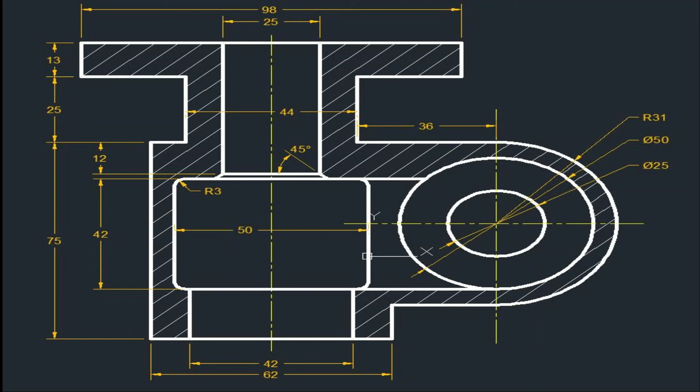Open a new file. This is the drawing. So, as we learn together, we have to select the start. I will start by drawing this circle and this circle.

Diameter of the small circle is phi 25, and the larger circle's diameter is phi 50. I will also draw the center lines for these circles. So I will draw a circle.

It is better to prepare the layers, so I will go to layer manager. In the layer manager, I will use layer zero for the visible lines, so I will choose color white, line type continuous, and line weight 0.5.

Then I will right click and create a new layer. Keep it layer number 1, or change the name if you wish, say center or hidden or whatever. I will keep it layer number 1, never mind. I will choose the color to be yellow for center lines.

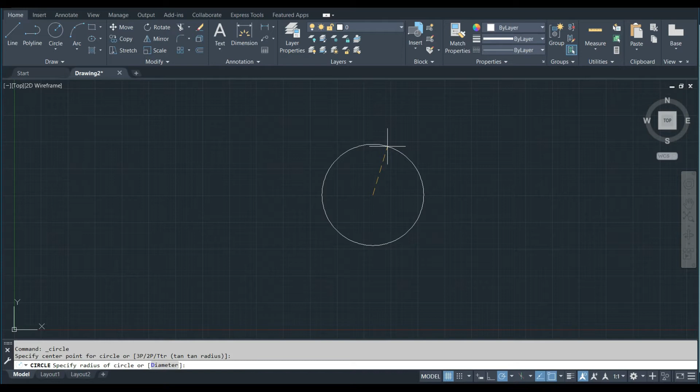Center of the circle anywhere, and diameter of the circle. Right click and say I want diameter. It was 25 for the smaller one.

Zoom in, zoom out, right click, repeat circle. I will choose the same center, and then right click again. I will choose diameter. Diameter value is 50.

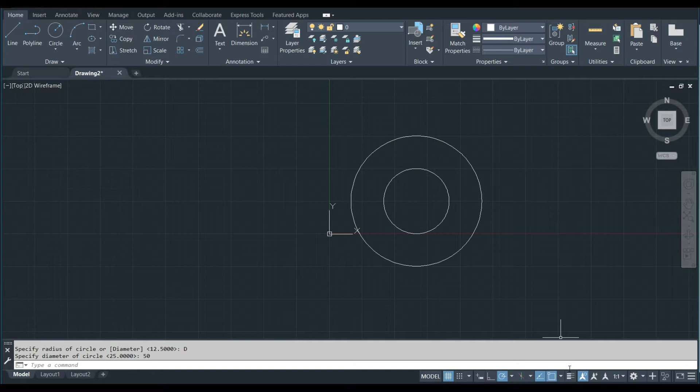As I told you, you have to go and show the line weights. Good. Now I will draw a center line.

I will go to layer number 1 and then draw a line, not from the center. I will just track, click, and then go back again, track and click. The center line is okay, but the line type scale is small.

Click on the line, right click, and go to properties. From properties, I will go and choose the line type scale. It is now 1. I will try 5 as an example. It is good, but not enough. I will say 10, enter. I think 10 is good.

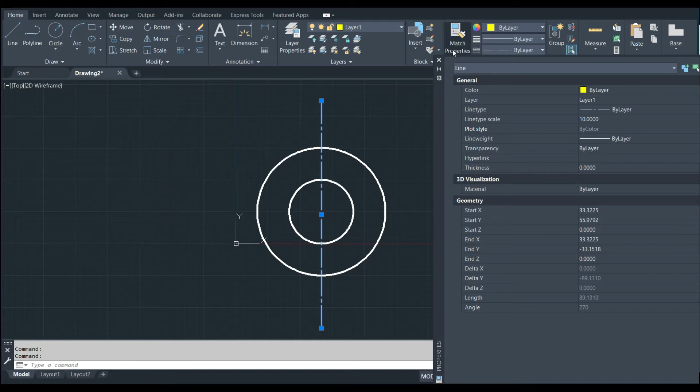Cancel it now, escape. Next, I will draw a line again. Same process - don't click on the center. Go out to make or to do tracking. Click and move again. Click here, and that's it.

And then match properties - take the properties from this line to this line to copy the line type scale and all of the properties.

Next step, I have this circle and this circle. So let me draw this semicircle with phi 62. I will go to circle, same center, right click, diameter. I will choose 62. Now this circle is on the center layer, never mind, keep it like this.

Next step, I will draw this line. This line length is 36. And I will draw the other line here, from here to here.

I don't know how much the length is. We should calculate the length. So let me check what dimensions are available here. Actually, from the center to this point, it is 36, and then 44, and also on the top we have 98, and here we have 25.

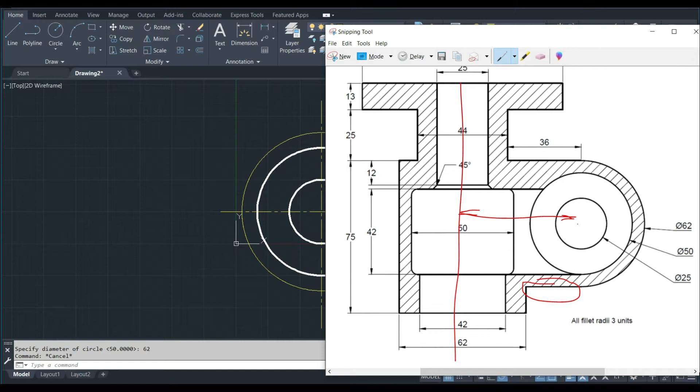Let me check if I can draw a center line at the middle exactly. Let me check how much the distance is between this center line and this center line. Let me do some calculation here.

Yes, we can say that it is 36 plus half of 44, which is 22 plus 36. It is 58. 58 from the center.

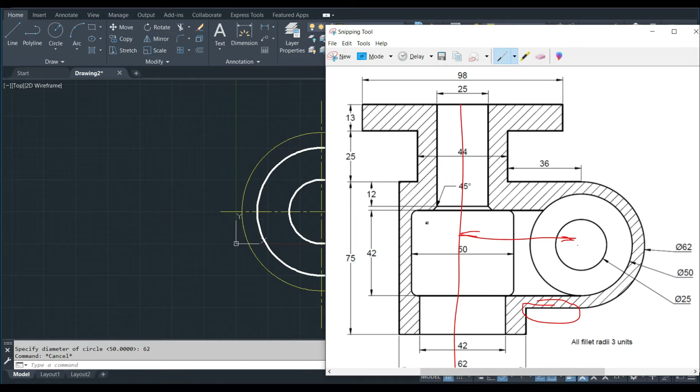So now what I will do is draw this line 36, and make an offset from this center line to here using a dimension of 58. Let me take this circle to the 0 layer, and again I will keep the 0 layer as current layer like this, escape.

Now I will draw a line from this quadrant point. I will move to the left and write 36, enter. It is 36, and also we need the offset of the center line, so I will choose offset.

It will ask for a distance. It is 58, enter. Select object - I will select the center line and click to the left, and that's it. Now we have this center line at the middle.

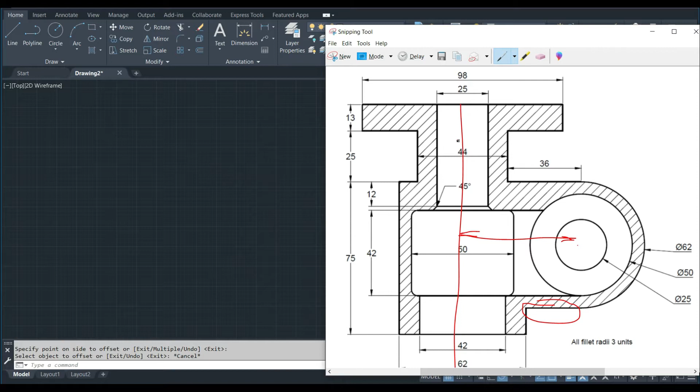Okay, we can actually offset the center line from here to here. It is half of 62, which is 31.

So I will draw a line or offset, it's up to you. Offset, say 31 distance - which line? This line to here, and let me take this one to the 0 layer.

Now as you see, we have this edge, so we can draw a line from the quadrant point here, then extend it until it reaches this line. So I will draw a line from the quadrant point to this line like this.

Now I will go to trim, select trim, right click, I will choose the mode. From the mode I will choose quick, then cut this line from here, cut this circle from here, cut the circle from here also, right click, enter. Now this line and this arc are not needed, I will delete them.

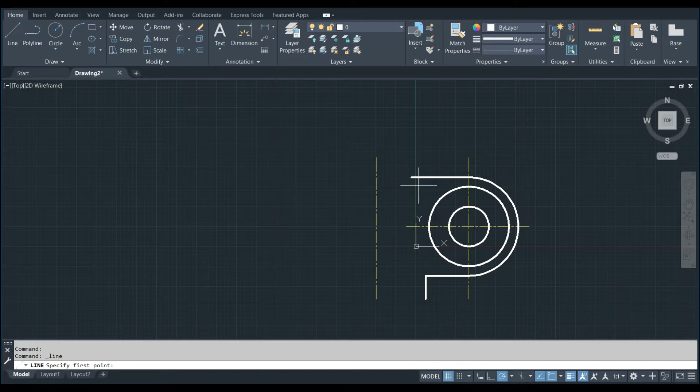Next step, we can draw this line from here to here. We need the length, it is 25. So we can draw a line from this point, go up. Before typing 25, be sure that the line is in a vertical direction. 25, enter. Next step, I will go to the right.

I need this length, actually we can calculate it: 98 minus 44 divided by 2. 8 minus 4 is 4, and 9 minus 4 is 5. So it's 54 divided by 2, which is 27. So we should go to the right, 27, enter.

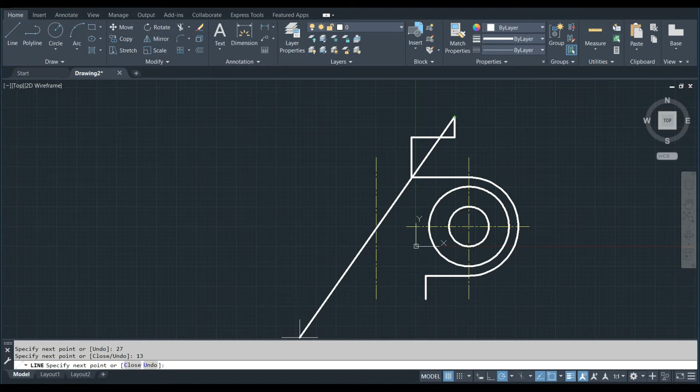And then I will go up 13. Now this is to the top, 13. Before pressing enter, I will be sure that the line is in vertical direction, and then I will go to the left by 98. This is 98, enter, and same story, guys.

I will track this line, this point, click here, and then go to inside. It is 57, I think. No, not 57. So I will right click undo. Maybe I forgot, let me go back and check how much this distance is. Again, it is 54 divided by 2, it is 27. Yes, it should be 27.

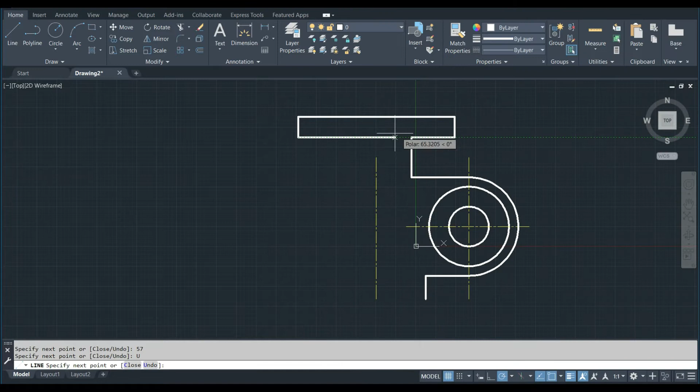So 27 like this, enter, and then go down, track this point, click, and then check. I will go to the left again. We draw this line. Okay, I will stop here.

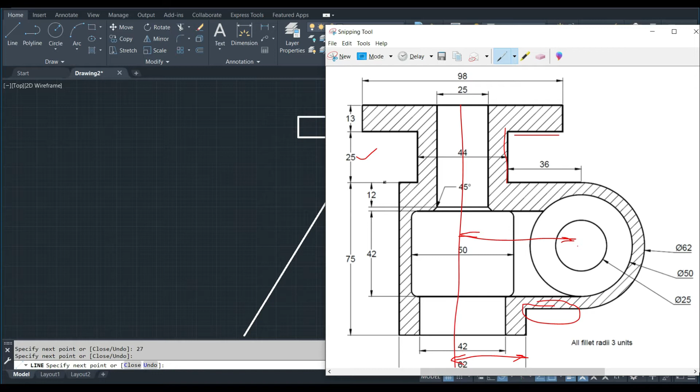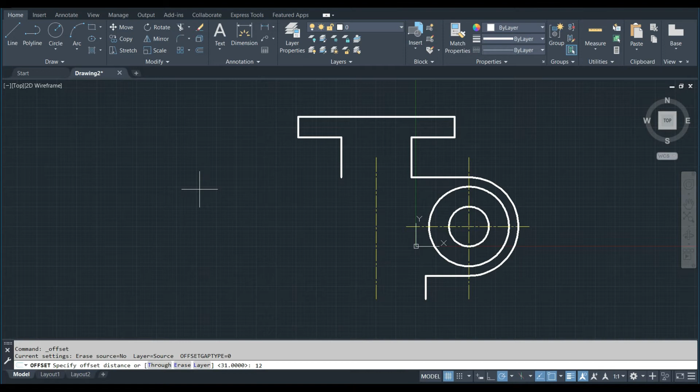Next, I need this line now, this line, and this line we can offset from the center by half of the 25. So we can choose offset, 12.5, this center line to the right, this center line to the left, escape, select this line, and go to layer number 0, or you can match properties, it's up to you.

And now I have these two lines, this line and this line. The line height from the top to the bottom should be 13 plus 25 plus 12. So we have 25, 25, 50. So total length is 50. Let me extend the line.

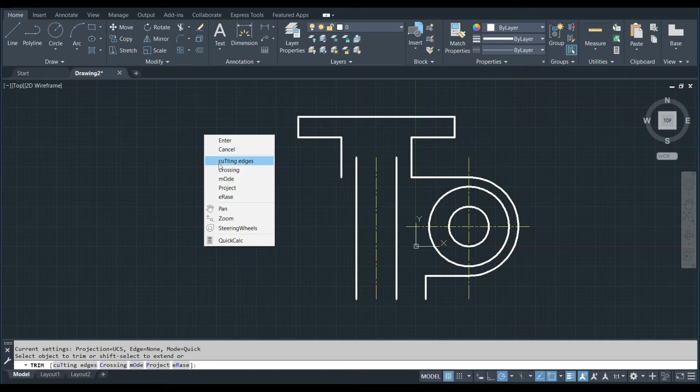Same, I will go to mode and select quick. Click on this point. No, this is trim, sorry. Control Z. Extend, right click, mode, I will choose quick. And then click here, then click here.

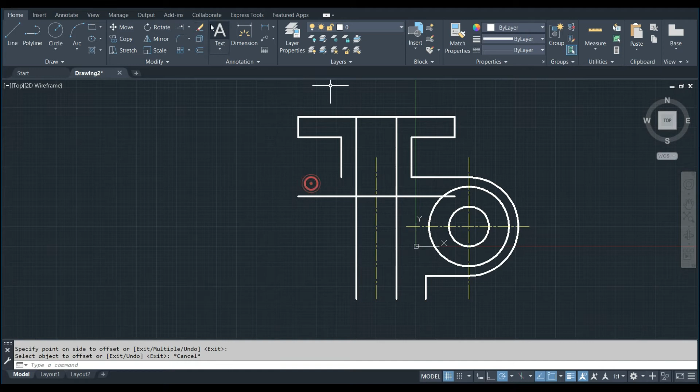And then as an example, we can make an offset. The offset should be 50 between this line to here, just to indicate the end of the lines. And then we can go back and make a trim. Again, right click, mode, right click, quick. It was quick in the previous selection, but I just want to show you how I can make it quick again.

And next, I will delete this line. So this line length and this line length is 50. Okay, and now we want to - I will make the chamfer later on, and this line later on.

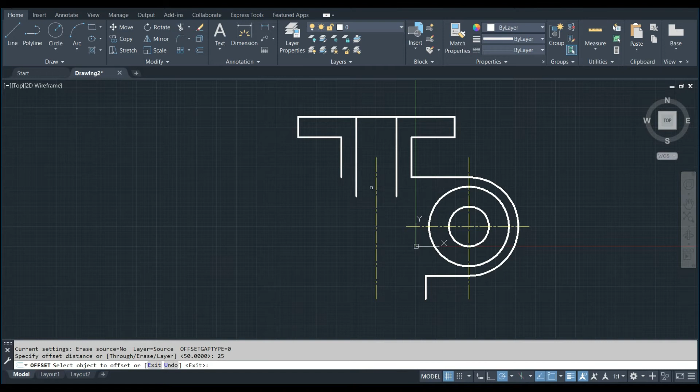Now I will try to draw this rectangle. This rectangle, it is from the center to here 25 and to here 25. So let me offset the lines by 25. 25, enter, this center line to the right and this center line to the left. You can match properties, take this line to this one to this one.

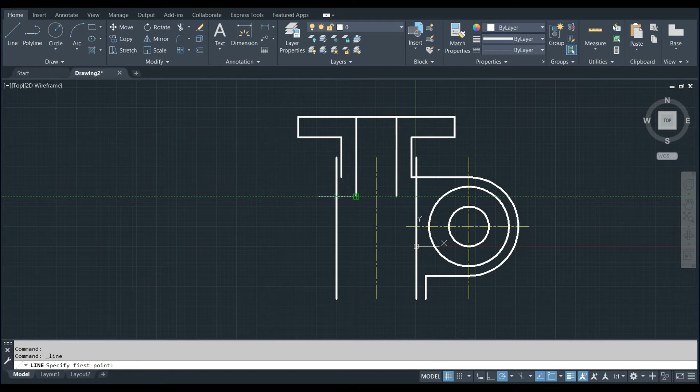And next step, let me draw a line. As you see here, we have a line, I don't know how much the length is. So, sorry, the length from here to here is 25, and from here to here is also 25. So we can draw two lines. I will track like this, or we can draw the line from here to here directly like this.

And we can also check if we can use mirror. I can't use mirror because the midpoint of this rectangle does not cross to the center. Okay, so what should I do? Maybe I will offset this line to here using a 42 dimension. So I will use offset 42, enter, select this line and click here.

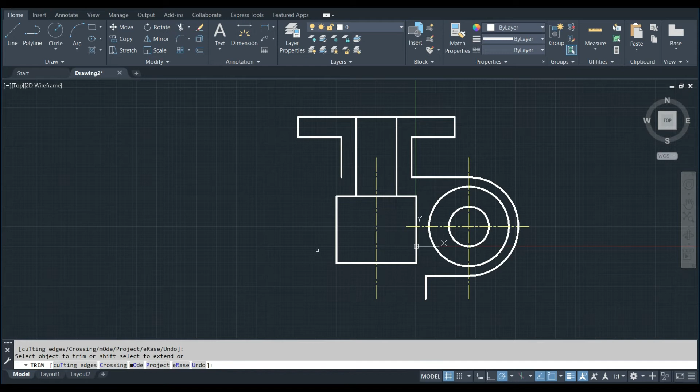We got this rectangle. Now let me make trim. I will choose the previous option, it's already on quick, so we can use it directly. Okay, so we got this rectangle at the middle.

Now we need the lower rectangle. Same idea, we can offset from the center to the left and right half of 42, which is 21. And the height of this rectangle is actually 75 minus 12.

It is 75 minus 12 minus 42, and actually this is a 45 degree angle, but how much the length, how much this height or length? Not given. Should be given, but all fillets radius here are 3 units. Where is the fillet? The small one. This is 3, and this is actually maybe 2, I think. I will consider it as 2.

So we have here 12 plus 2, 14, 14 plus 42, it is 50, 56. 56 minus 75, or 75 minus 56, it is 20. So we have 20 here. Okay, this distance from here to here, it is 20 units.

Okay, so I will make offset by 20, from this line to here, and also from the center I will make offset half of the 42. Again, offset half of the 42, 21, enter, from the center line to the right, center line to the left, and then you can match properties from this one to this one and to this one, and then, as an example, I will do the following.

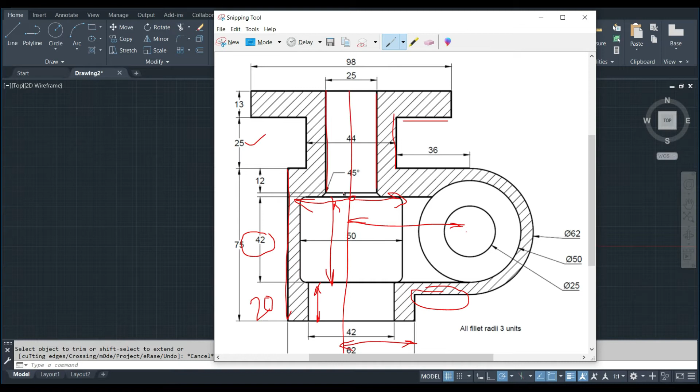Now I will try to draw this line. This line offset from the center, it is half of 62, which is 31. 31 again, offset 31, enter, from the center to the left. Again, match properties from this one to this line.

And then we can connect this line to this line. Click here, just take the grip to this point. Okay, and now we can connect from the bottom also. Again, let me show you what I will do. I will connect here.

So we can draw a line from this point to here, and then zoom, and then take the grip to here, and same idea from here. But we have a problem. No, we don't have the length of this line from here to here, so we'll do the same thing, just connect from here to here.

So I will draw a line from here to here, and then take this point to this point. I think we finished the drawing. Let me check again. This one it's okay, this one it's okay, this one it's okay, but we have this line and this line and this line and the fillets.

I will add them now. So I will click here, guys. We can just take this grip to here, click this line again, and take this grip to here.

But we have a problem here. It should be tangent on this side. I did a mistake somewhere. Why is this not tangent? What I did exactly? I think the problem here is this distance is not given.

So what I will do, I will try to start again from the tangent. So this line, it is tangent to this circle, and then I will take from here to here the 42. So again, what I will do, I will go and draw another line. Let me draw another line from here to here.

Okay, remove this line, extend and trim. So I will choose shift, trim to extend, shift and trim to extend, and then I will do trimming like this without shift. Now I have to be sure that this length is okay.

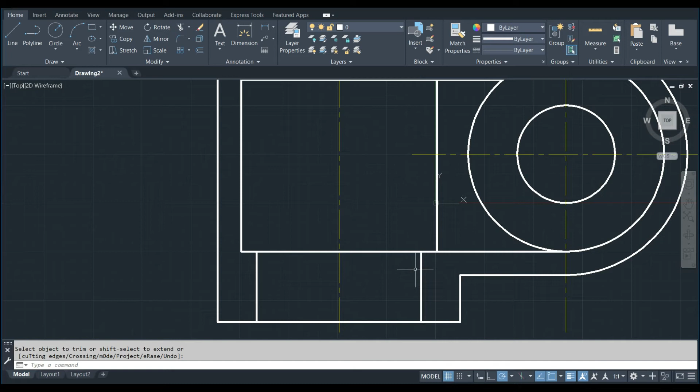So I will go here and say that this distance, I don't know how much. I don't know how much this distance should be given. I will leave it like this.

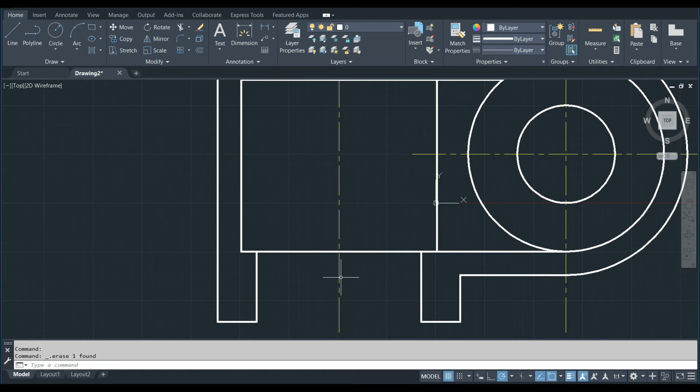But we can know exactly where is this line from the 75. So I know this is a correct line. I will offset 75 to the bottom. So I will delete this line and this line and this line, and I will make offset from again the distance, it is 75 from this line to here.

We have just a little bit small distance variation, so it's okay. Now I will go again and make trim, shift, trim to extend. Same thing here, same thing here, same thing here, and then we can be sure that the connection is okay. Here is okay. Done from this side.

Now this rectangle height, how much it should be from here to here? It should be 42. Just let me be sure of this distance. I will remove this line and I will offset by 42. Enter. I will choose this line and this distance. Now it is okay, now it is okay.

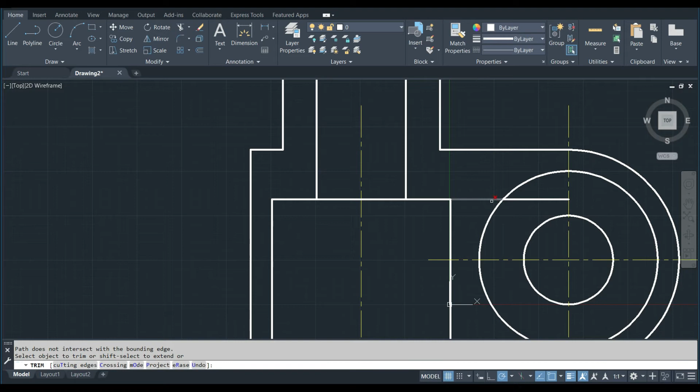I will go and make again trim and extend together. So this is trim and shift trim to do the extension, to make the extension. And here again we have trim. Now I fixed the problem.

Next step, we have fillets, and here we have a chamfer. The chamfer, it was how much? This chamfer is 45 angle, but I don't know the height. We should calculate it again.

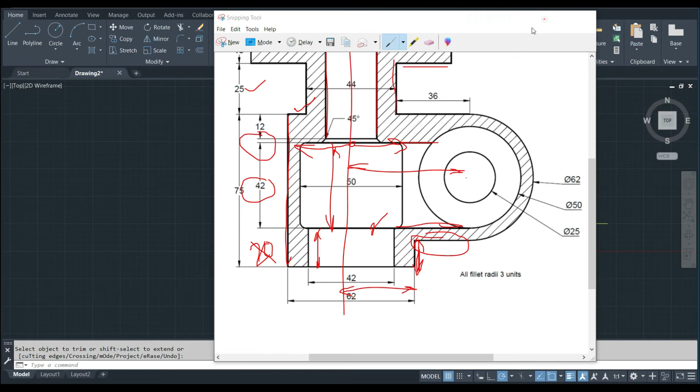This is not correct, 20. I use the offset from here to here. So we have from here to here, 12. Let me go to tools or measure.

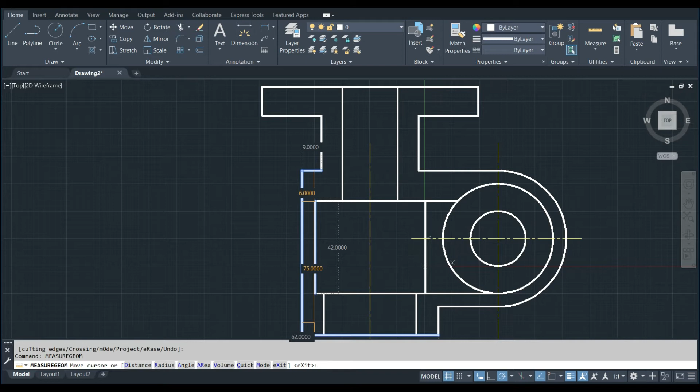We can say measure, enter, okay. We need this distance from here, from this point to this point. So here we have from here to here, it is 62. From this line to this line, it is 62.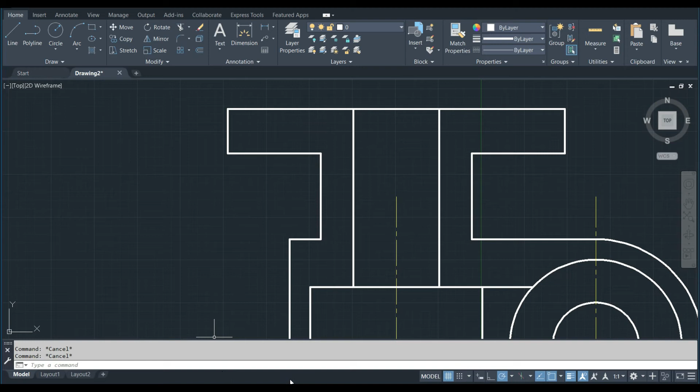Let me go back to the drawing. From this line to this line, it should be 52. So 52 minus we have here 50, it should be 2. And this is what I said at the beginning, it should be 2. So 2 by 2, we have a chamfer here, 2 by 2.

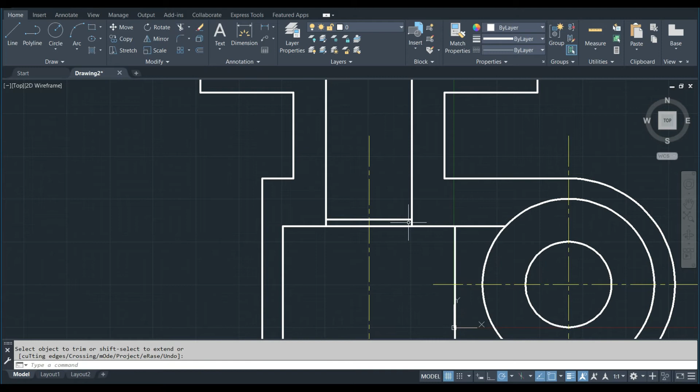Let me offset first a line by 2, enter this line to the top, and then I will trim this line and this line, and then I will draw a line from here by 45 angle.

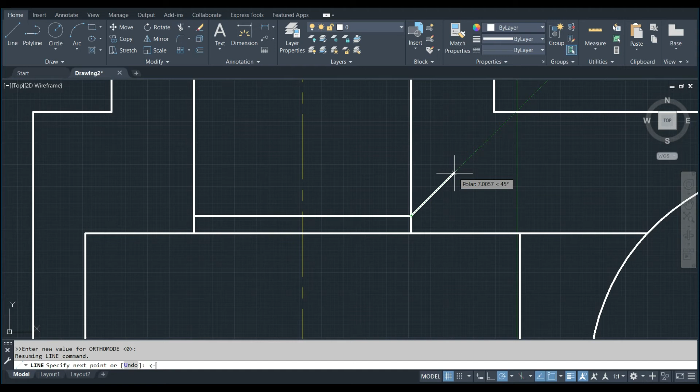As you see, it is shift and the angle which is less than... sorry, it is the angle, and the angle it is 45, but it is minus 45 to go down in this direction. Now I will connect or extend the line like this. I will do the same thing from this edge, but the angle should be minus 135, enter, and now I extend like this.

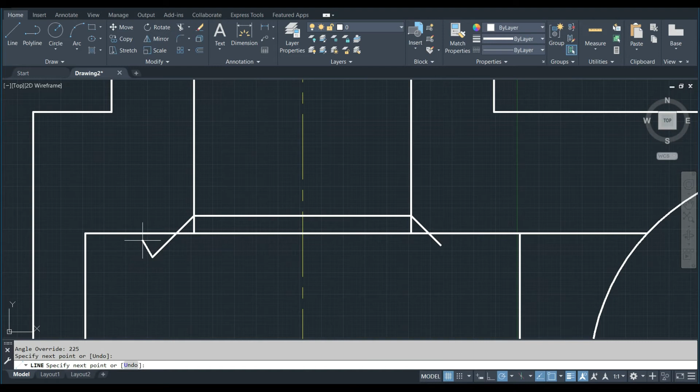Last step, I will trim this one, and trim this internal line, and trim this internal line. I think we did this one correctly. Next step, I will make the fillets.

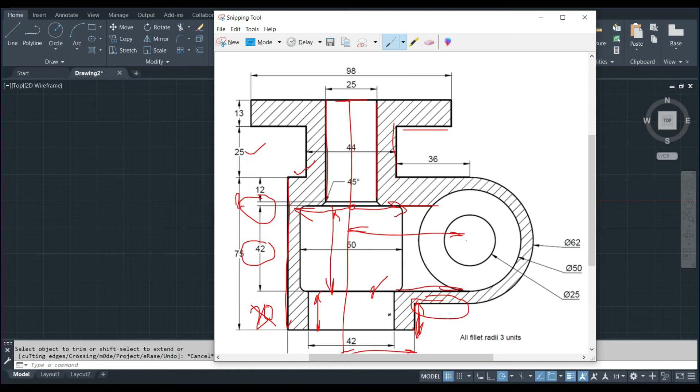Fillets are all 3 units. So I will go to fillet, right click, radius should be 3, enter, right click, multiple, because I will do it more than one time. I will do it between this line and this line, and again this line and this line.

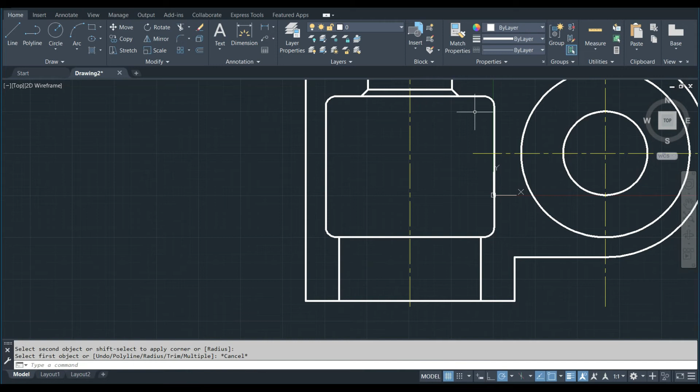Never mind, I will fix it again and draw between this line and this line and this line and this line. Just click on this line and take the grip again, and same thing here, click here. We have an option with the fillet that will remove or keep the line without trimming it, but I will do it like this. Now we finish the drawing.

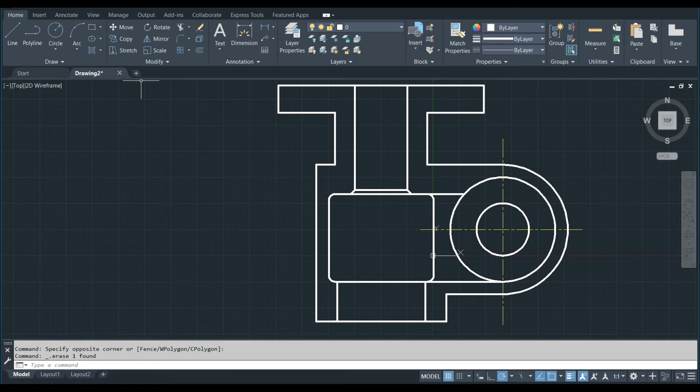I think this one we should remove it or keep it, I don't know. We have this is just a multi-view or section view. Let me keep it like this. Maybe this one is just a cylindrical shape or hole, so keep it like this, never mind.

Next step, the last thing for the drawing, we have to add the hatch. It's very easy for the hatch, just type the hatch, or you can select the hatch from here. As you see here we have the hatch type, it is the default one.

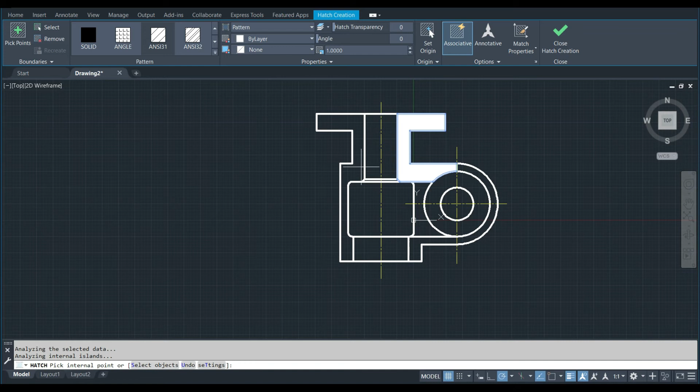Just click the areas, this area, and we have also this area, and I think this area and this area. Let me be sure that everything is okay. Yes, all these areas. As you see, the scale, it is too much, so the scale, it is 1.

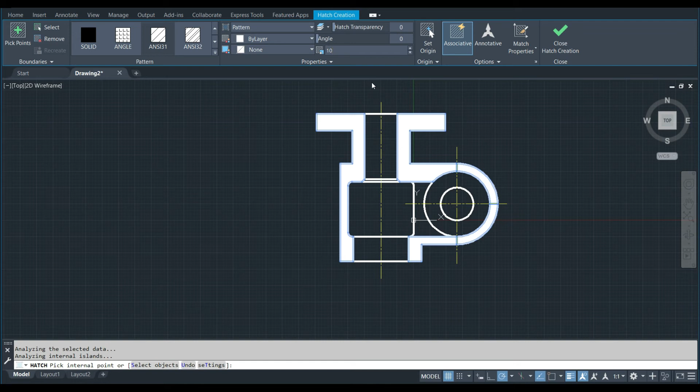We can change it to 10 because the section lines are too dense. Angle, it is 0. Be sure that, okay, I think the scale should be 50, better. Make it 35, better. Yes, very good.

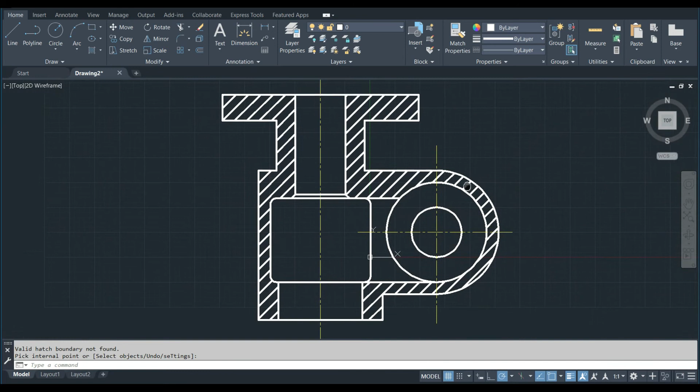And then close. But I don't like the hatch line to be thick lines, so I will choose them and go to right click, properties. From properties, go to line weight, not by layer. Make it 0.15 because the section lines should be thin, not thick, like this.

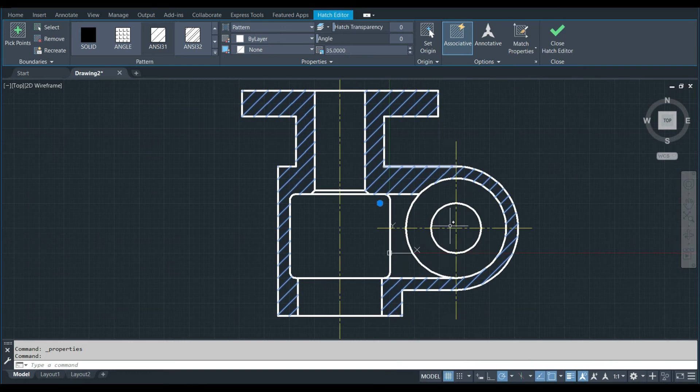The last step, guys, we want to add dimensions. How we can add dimensions in AutoCAD? It needs some experience or practice, but I will try to make it in a quick and clear way.

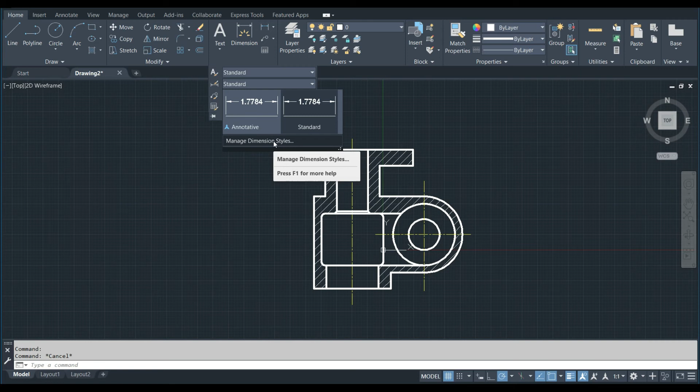At the beginning, we have to go here to annotation. As you see here, we have annotation. The current one for dimensions, it is the standard. My advice, we can go to the standard like this and go to manage dimension style, or you can type DIMSTYLE directly and go to the style manager. This is the standard, which is the current one.

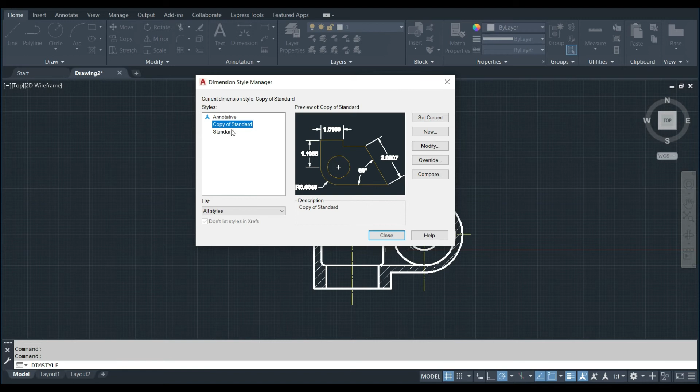I will choose new, give it a name, any name, 123R, anything, or copy of the standard. Continue. So we copy the standard. Now this is the copy. Press OK. As you see, we have a standard and the copy. Click the copy and set current. This is very important, guys, to select the current style to be the copy of a standard. Set current. Okay, now the current style, it is the copy.

Let me try a dimension, any dimension from here to here, and go up.

First of all, as you see, the text is very small. Before that, guys, I forgot to tell you that we have to go to layer manager again, right click here, add a new layer, give it a name, dimension layer.

Dimensions, as example, could be in white or any color. Surely it should be continuous, but the line weight should be 0.15. Let me give it a color like this. Never mind, you can keep it white, it's up to you. Now the current layer is 0, I will choose the dimension layer.

I will delete this dimension again. I will choose dimension. From dimension, I will take this point and this point.

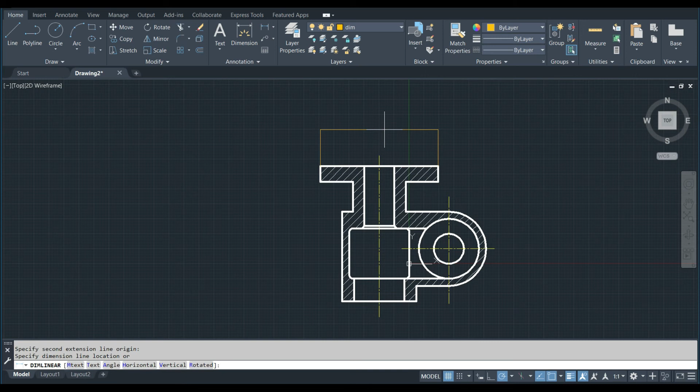As you see now, the properties for dimensions are correct, but the scale of the dimension is not good. I can't see the arrowhead. I can't see the dimension itself, the text. So what should we do?

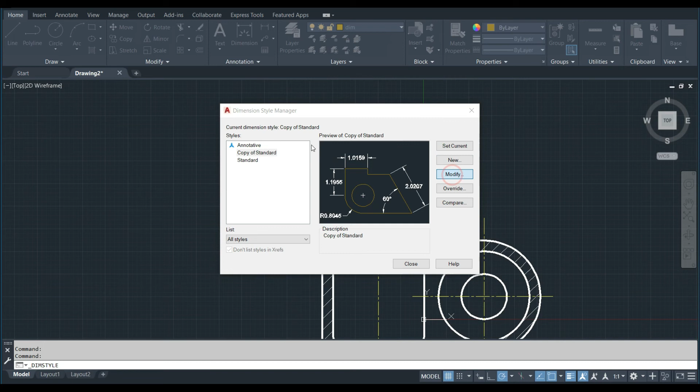Remember that the current style is a copy of the standard. So I will click here, then go to manage dimension style. Be sure that you selected the copy. Now modify. My advice to you all, guys, this is my own algorithm.

Go to text, increase the text size. I think it should be 2 or around 3. I will select 2 because it is very small. Test, close. Now it's okay.

See, I think dimensions are okay. Maybe we can go back again to annotation, copy, then manage. Be sure that it's the copy, then modify again. Let me choose 2.5 and try again, close. I think it's okay, so remember that text size is 2.5.

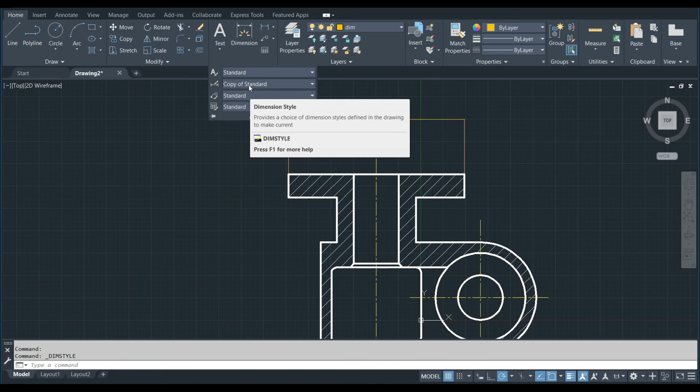Again, my algorithm: after setting the text size correctly, go again to the style, manage, modify. Now, guys, any distance, keep it half of that text size at the beginning. Arrowhead size same, the text size, or just a little bit less than the text size.

So I will go to symbols and arrow size, say 2.35, and go to lines. The extend beyond dimension line, it is this extension after the arrowhead. Make it half of the text, say 1.3.

Offset from origin, it means the offset between the extension line and the point. Again, half of the distances, start from the half of the text size, say 1.3 also.

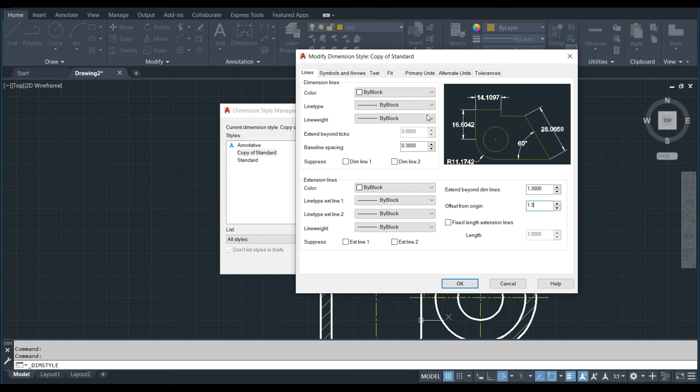We have here also primary units. Be sure that precision depends on the dimensions you have. If you have fractions or you don't, I think in my drawing I don't have fractions, so I will keep it like this. And the separator, it's the period or dot.

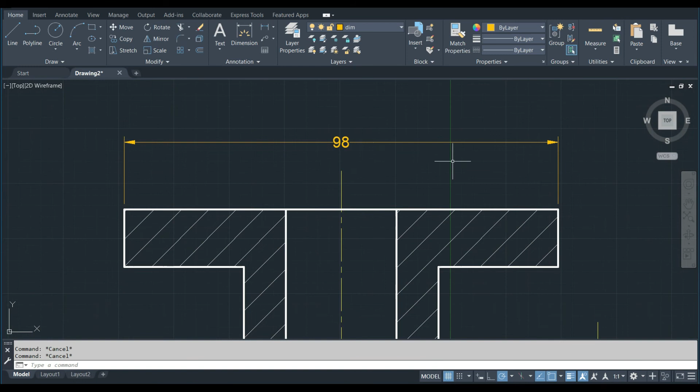Okay, close. I think now, if you look to the dimension, it looks good, but distances are not enough. This offset between the number and the extension line is not good, this gap is a little bit small. I will make it larger, and same thing for the extension beyond dimension line.

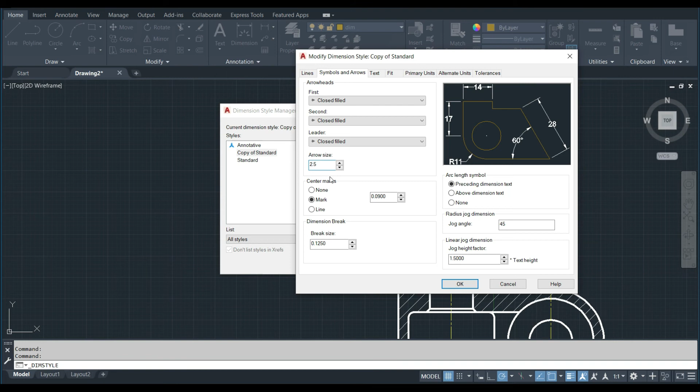So I will go to the last iteration. I will go again to manage the style, then modify, and go to arrowhead, make it 2.5 exactly, and go to lines, make it 2 by 2, 2 by 2 like this. Press OK, press cancel, but still this distance is not right, I forgot to change it.

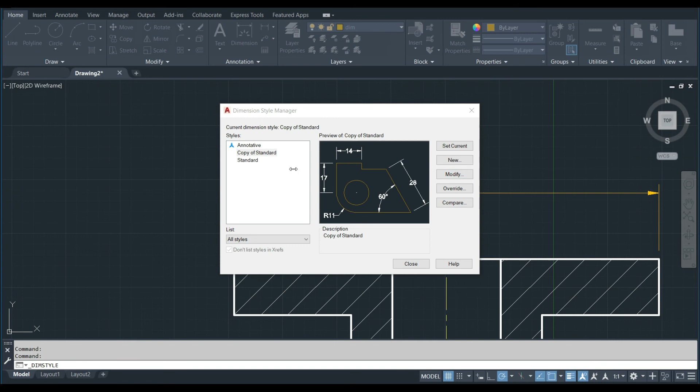So I will go again to modify. From modify, I will go to text. I forgot actually to increase this, yes, offset from dimension line. I forgot it. Same idea, it should be at the beginning half of the text size. But now I know half of that, say 1.52. It's okay. Close, now it's okay.

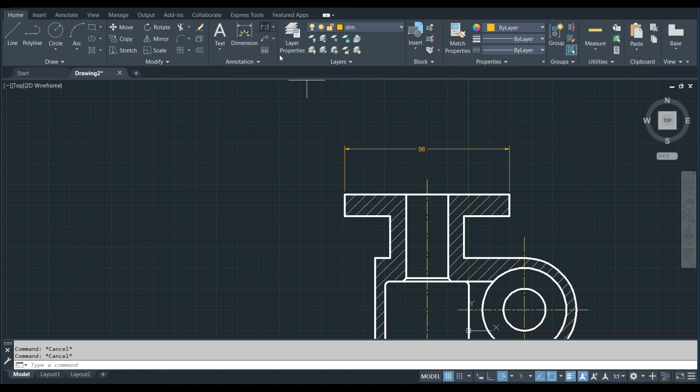Now, how can we add dimensions? We need to make the same dimensions, and you can make your own dimension. I will do the same or use my own. Never mind. We have here linear dimension between this point and this point. Drag and then click, and you can zoom in like this, guys, and change the distance.

We need also this distance, 36. So we can go linear dimension from this point to this point, should be 36. And also say that the 44, right click, repeat dimension, linear dimension.

Now we can right click here, guys. Be sure that the midpoint is active, and I will select this midpoint. Sorry, again right click dimension. I will select this point and this point, which should be 44. Don't keep the text at the middle, crossing with the center line, move it like this.

Also, we need the 98, 25. Okay, this is done. We need the height 13 and 25. So again, right click dimension linear from here to here. It should be 13. Click on the 13 like this, move it to the midpoint.

Right click, repeat. We can take from here to this point and then move it like this. We have a continue dimension, but I will teach you how to fix it by yourself. Click like this. Take the grip from here to here.

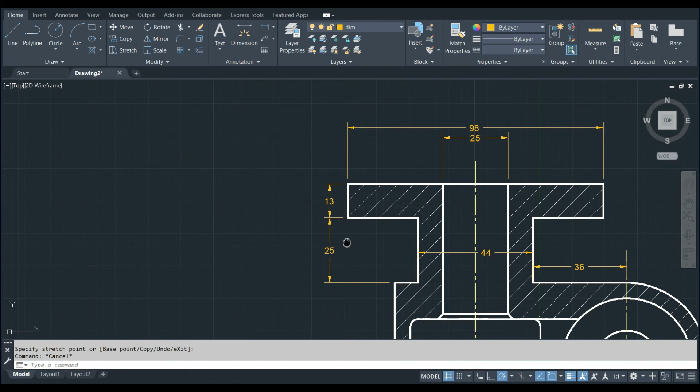Next step, again, dimension linear from this point to this point. Zoom, click, take the grip to the grip. Again, I have a continue dimension here. You can select it. One of the options, as you see here, we have linear, aligned, angular for angles, radius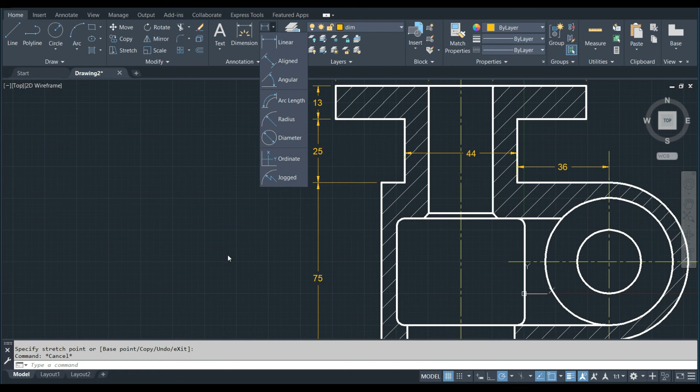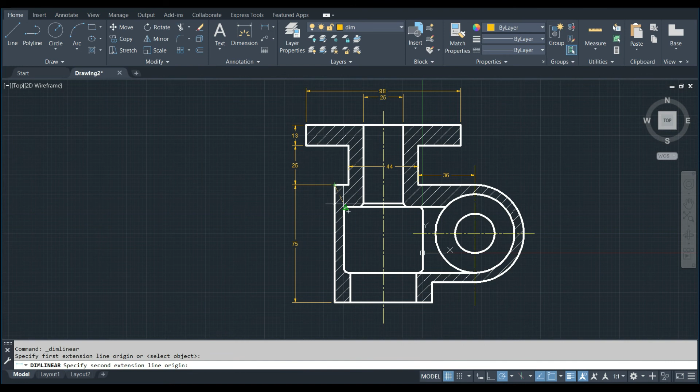for radius, diameter, and so on. Next step, we have the 12 and 42. Again, we need the 12 between this edge and that edge. So draw between this edge and this edge. This is 14. So we can keep it 14 like this, never mind. Or we can take this grip, take this grip from here to here. It is the 12. Click and again move the 12 to the middle point.

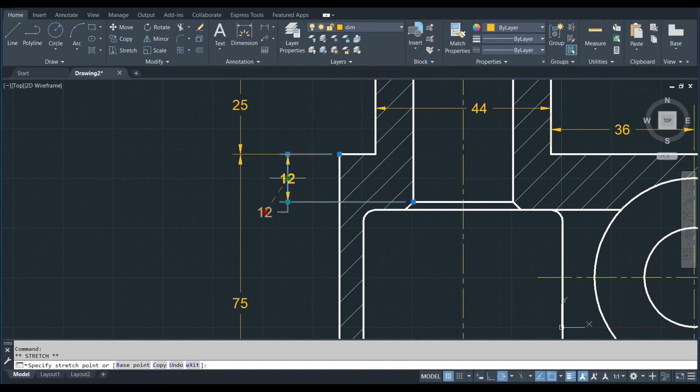And again, we can take linear dimension from this point to this point, which is 42, like this. This is the 42.

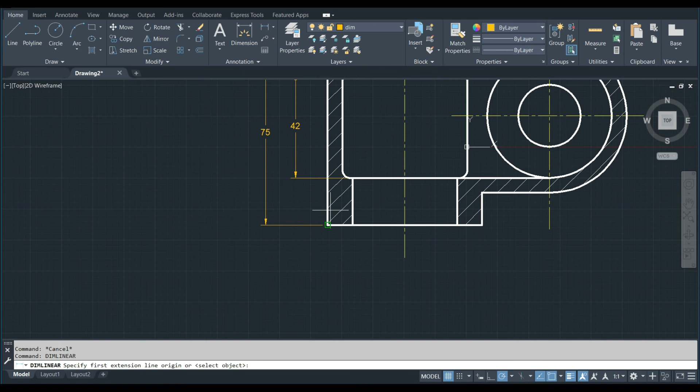75 is okay. Now we have 42 here and 62 from bottom. So again, right click dimension linear from this point to this point. This is 62. And we need again right click dimension between this point and this point should be 42. We can just click like this, guys, and move the center line and this dimension

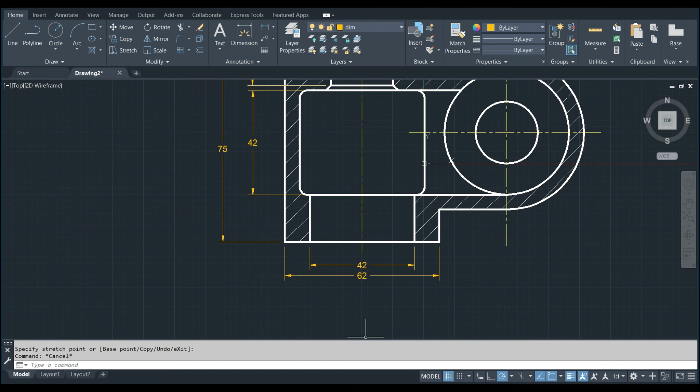like this. Next step, we have this 50, internal 50. Again, linear dimension between this point and this point, it is 50. Dimension between this point and this point. Should be 50. Again, move the text a little bit to the left.

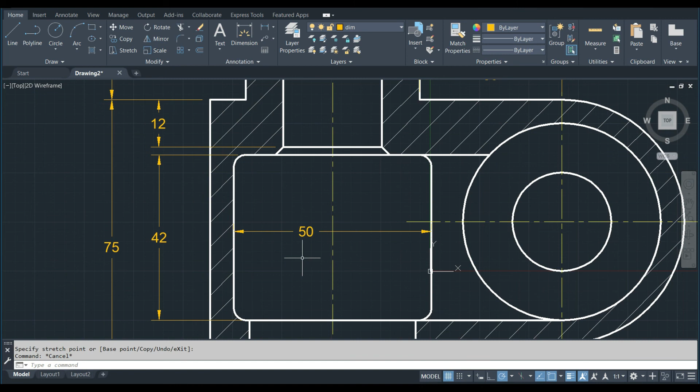Now diameters. I will click to here and select diameter. This is diameter. I will select the outer one and then right click again, diameter, select this one. Right click, diameter again, select this one, like this. Okay.

Actually, I do the following, guys. I click on this one, right click, go to properties, and from the properties, go to... I forgot what it is. Fit dimension line forced. Make it on the forced dimension line.

I will show you what I did exactly. As you see, we can see the dimension line extended from here to here. So I will go to match properties. I will take this one to here, to here. Let me also right click properties.

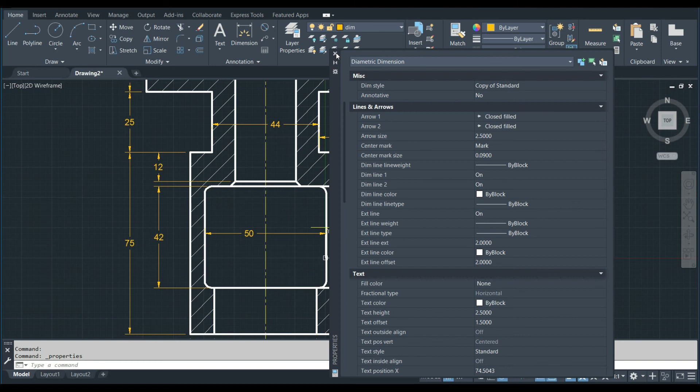We can fix it from dimension line style, but I'll show you here how we can fix it. Or okay, I will go to annotation. From annotation, I will go to here, dimension. Okay, modify. I will go to arrow symbols and arrowhead. Okay, center mark. It is a mark.

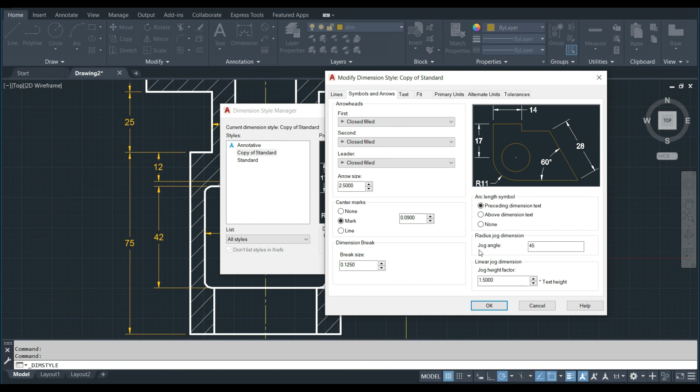Okay, break size preceding. Actually, I forgot. This is not good to make to keep it like this. I will delete it and make radius instead. So I will go to here, select radius, select this circle and move it like this, guys. Go up like this, and then you can go to match between this one and this one like this. Because here we have an arc, not a circle. We should not put diameter.

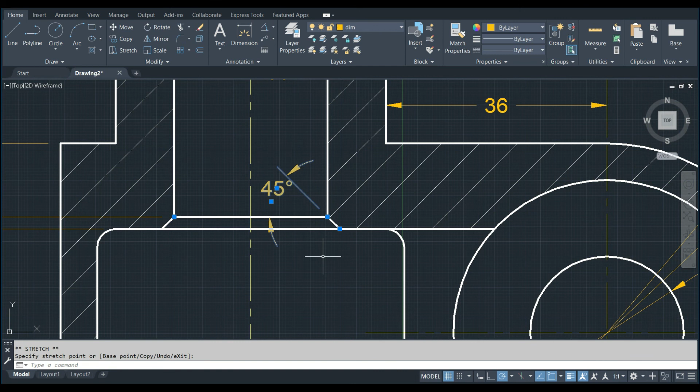And the last thing, I have to add the angle here. We can go to dimensions, choose angular between this line and this line. We can show it like this or like this or like that, or we can, if you wish, we can add, this is okay. We can also add a note, but I prefer to keep it like this as an angle. This is good also. We can take the text outside to make it more clear like this.

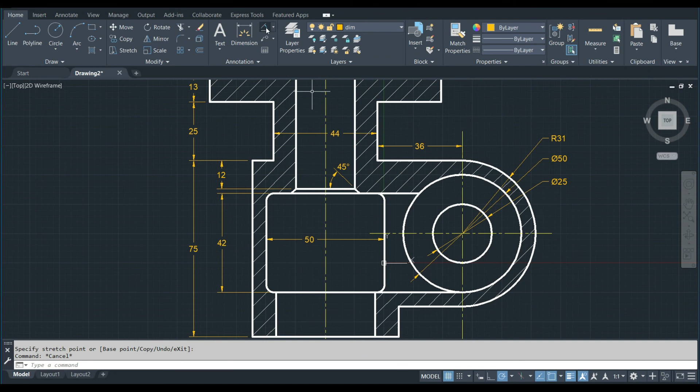I think I finished all of the dimensions, the needed dimensions. Fillet radius, we can add the fillet radius. Go to here, select radius, and we can select this radius like this. Like this, okay? Just keep one of them. That means all of them are same.

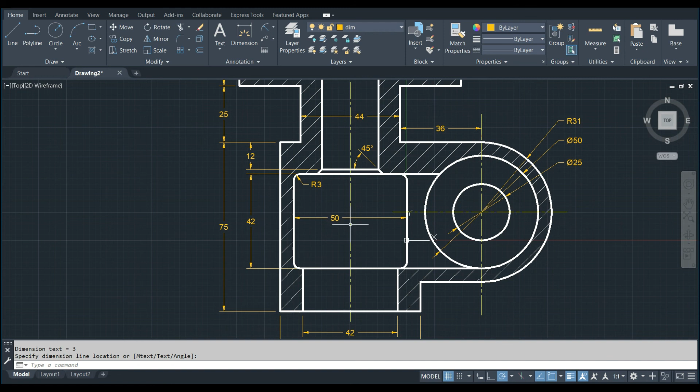To change the hatch type, the section lines type, we will double click on the hatch again, close this one, and then we can go to the hatch type we want. This is the current one, the by default one. We can choose this one as example, or choose one of the other hatch types like this one. But I prefer to use the default one for this course. So I will go back to choose ANSI 31 and keep it always like this.

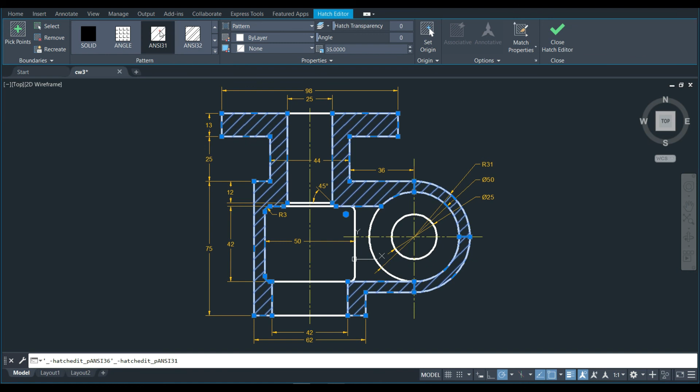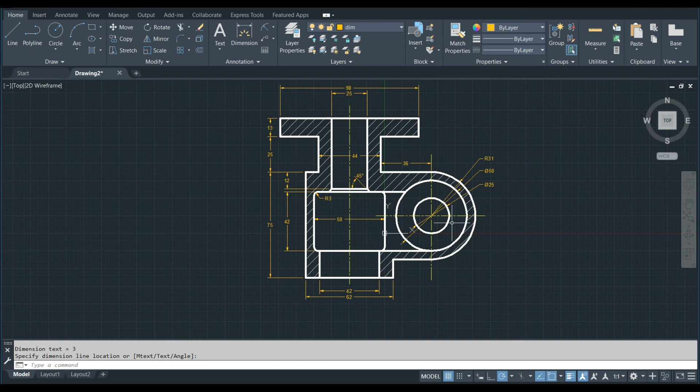So I hope that we learned together today how we can draw a section view like this one, add the section lines, and use the layers again, and put dimensions and modify the dimension style. Thank you so much.